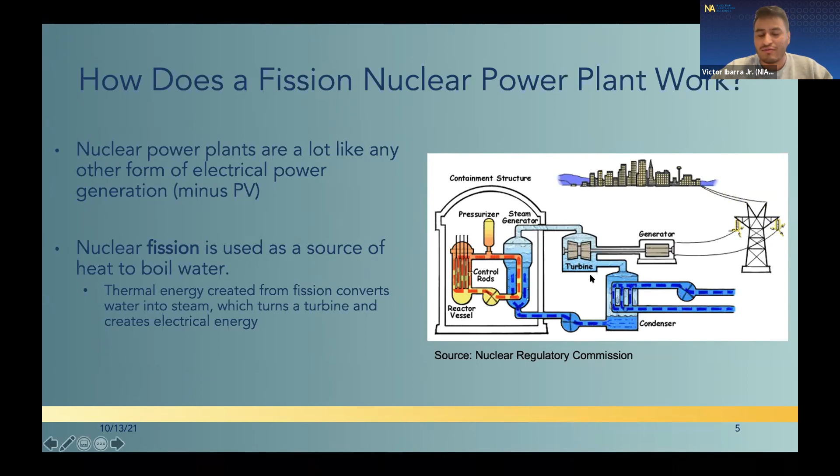So this is also a pretty fascinating concept to explain if you have kids in grade school right now, what the different transitions of energy look like. So we have nuclear energy being converted into thermal energy, to mechanical energy and electrical energy. So it's all very, very fascinating. And as you can see here on the graph on the right, from the Nuclear Regulatory Commission, we have a simple schematic of how a conventional nuclear power plant operates today.

So why nuclear energy? Why do we care about this, and what does it do for us? So nuclear energy is extremely firm, it's clean, it produces zero carbon emissions, and it is extremely, extremely dense. And why is this so important? As Kim was saying, I used to work in Houston, and when I lived in Houston, we experienced a variety of natural disasters such as hurricanes. We experienced the Texas freeze as recently as February.

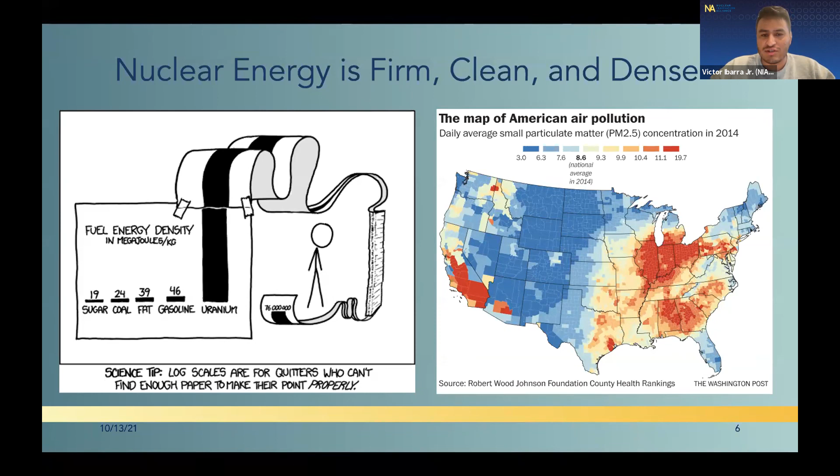And when we're talking about climate mitigation or addressing climate change going into the future, we really need to make sure that we have all the available tools at our belt, and we include all types of technologies moving forward when it comes to securing a very broad energy portfolio. So we want to make sure that nuclear energy is included because it checks off a lot of the boxes, which is that it produces zero carbon emissions. It is firm, which means that it can be paired with variable energy sources like solar or wind whenever they're not producing electricity to back them up. And like I said, it's extremely, extremely dense.

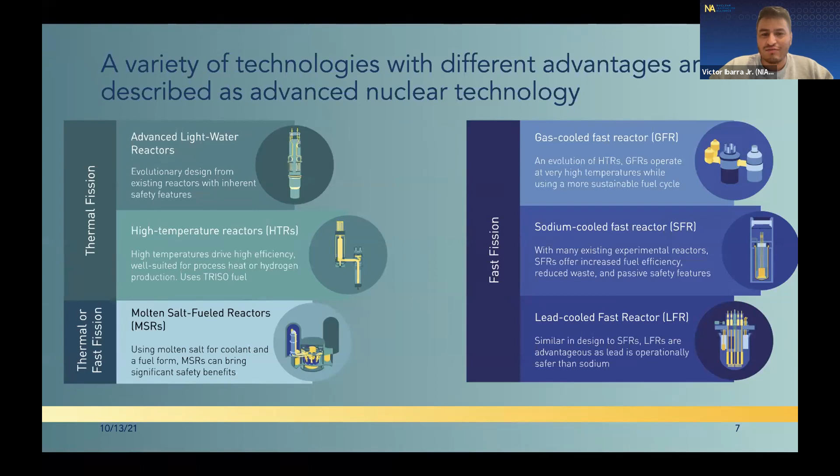So advanced nuclear energy is a very, very broad term. So in these pictures here on this slide, I have kind of broken down what types of technologies we are looking at at the Nuclear Innovation Alliance. We have different types of technologies that range from advanced light water reactors to high temperature gas reactors, molten salt reactors, sodium cooled fast reactors. There's a lot of different types of technologies that are currently being pursued and developed here in the United States and globally, which is really, really exciting because there's a lot of pros to each type of technology.

And the primary reason why people and communities and even policymakers are taking a second look at advanced nuclear technology or nuclear technology in general is because it addresses a few of the concerns that people may have had previously about nuclear energy. People consider nuclear energy not to be safe, and that's not what we believe to be true. We believe nuclear energy is extremely, extremely safe. And this is further addressed by the fact that advanced nuclear energy wants to make nuclear even safer than it already is.

So it does that by changing kind of the fundamental way a nuclear power plant operates by transitioning from active safety systems to inherent safety systems, which essentially means that they rely more on the laws of physics to ensure that whenever a reactor has to go into shutdown mode, it does it without any human input and does it essentially by itself, which is really a marvelous type of engineering. And it also reduces the amount of nuclear material associated with the plant.

So, we have reactors that used to be extremely large, but now we're looking at reactors that may be a lot smaller. And because it's a lot smaller, there's a smaller amount of nuclear fuel associated with it, so smaller inherent hazard. We'll also be using new types of fuel forms, whether it's advancements in technologies that have already existed from the 60s, like what was TRISO fuel or used to be BISO fuel.

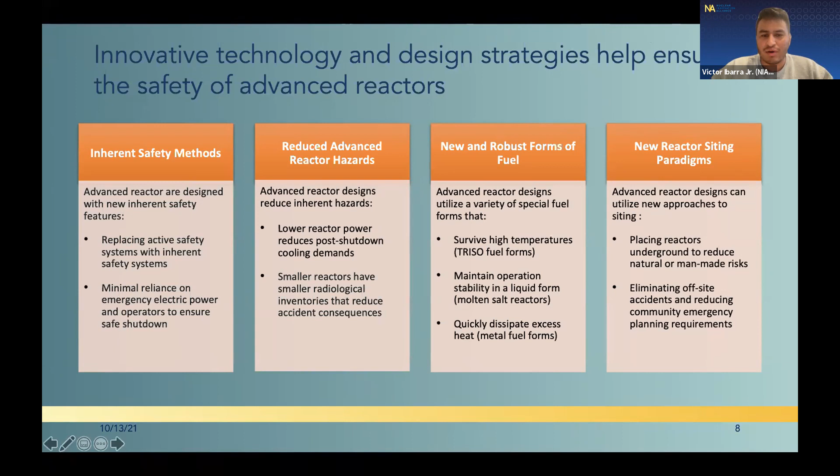And we will also be changing kind of the way we think about siting reactors in the future, because they will be potentially smaller. We will now be thinking about areas that we may not have thought about previously in terms of how we site them or where we locate them. So this, paired with the fact that advanced nuclear technologies have a unique capability to decarbonize multiple sectors, is really making people take a second look at advanced nuclear energy.

So advanced nuclear energy can not only be just used for electricity, but it can be used for potentially district heating. It could be used for co-production of hydrogen, which is a really hot topic right now in the Department of Energy here in the United States, and even globally in entities like the European Union. It could also be used to potentially decarbonize the transportation sector, whether it comes to even just vehicles here in the United States, as in cars, but even maritime or boats in the ocean.

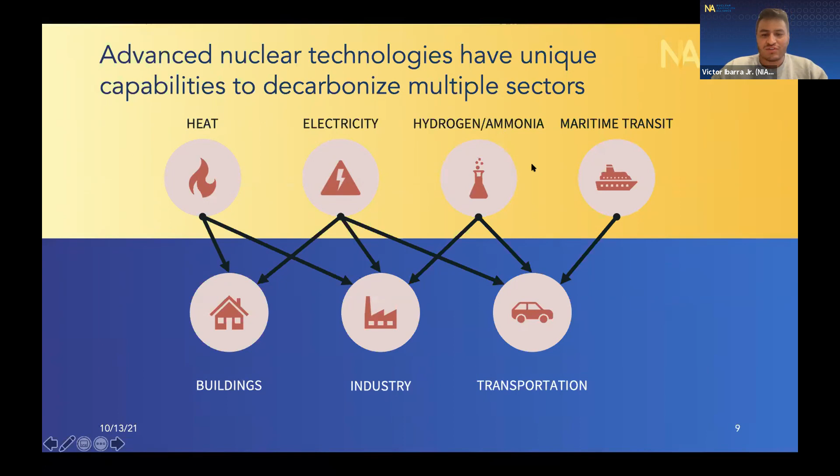It could heat homes. It could decarbonize parts of other industrial economic sectors. Like it could be used to power steel or cement making associated practices. And it's just a really versatile way to decarbonize a lot of the economies that exist nowadays in the United States. So when you put all of these together, it's just a very exciting time to look at advanced nuclear energy. So now I just want to take a little step back and kind of compare advanced nuclear energy to conventional nuclear energy.

So on the left side of this table, we have kind of the characteristics that are associated with a lot of conventional nuclear energy, which is primarily the fact that they're a little bit larger reactor sizes. They are more than 1,000 megawatts electric in size. They're predominantly associated with one type of technology, which is light water reactor technology. And they're primarily baseload generation sources, which means that they operate continuously for about 18-month cycles primarily, depending on if they're pressurized water reactor or boiling water reactor.

But this is extremely important because we are expanding our energy portfolio in terms of how much renewable energy we have in it. So this is really important because the more renewable energy that we produce, we need to make sure that we back it up with either an energy storage system, or we back it up with something firm like nuclear energy, which is why conventional nuclear is really cool. And then these systems are primarily designed with active safety systems and exclusively use LEU fuel rods.

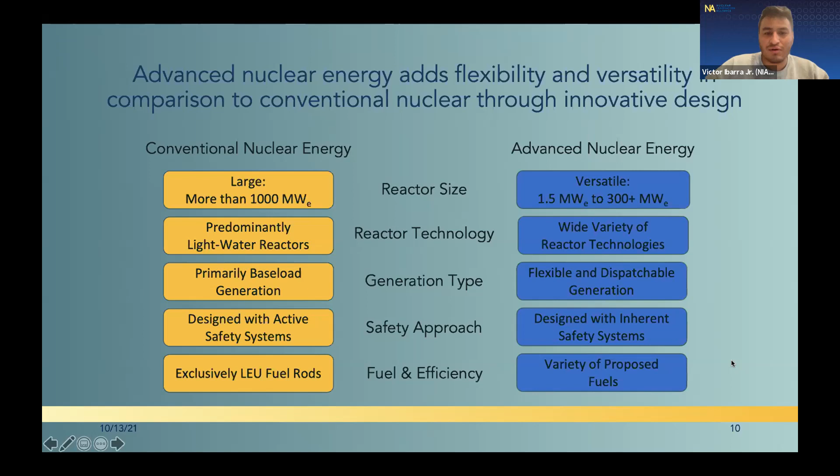emergency response situations. Like I said, before I moved here to DC, I used to live in Houston, where we were affected by the hurricanes and by the winter freeze, and getting power to communities that are hit by disasters is really, really important. So that's also another application of nuclear energy. Advanced nuclear energy will also, like I said, be designed with inherent safety systems and will also have a variety of different types of fuels.

So what does this timeline look like? Because of a lot of the bipartisan efforts that have occurred in Congress over the past couple of years, and because of what's going on now, there will be a few demonstration projects under the Advanced Reactor Demonstration Program that will occur in the late 2020s. For those of you that do not know about the Advanced Reactor demonstration projects, they are essentially award winners that will be able to demonstrate their technology.

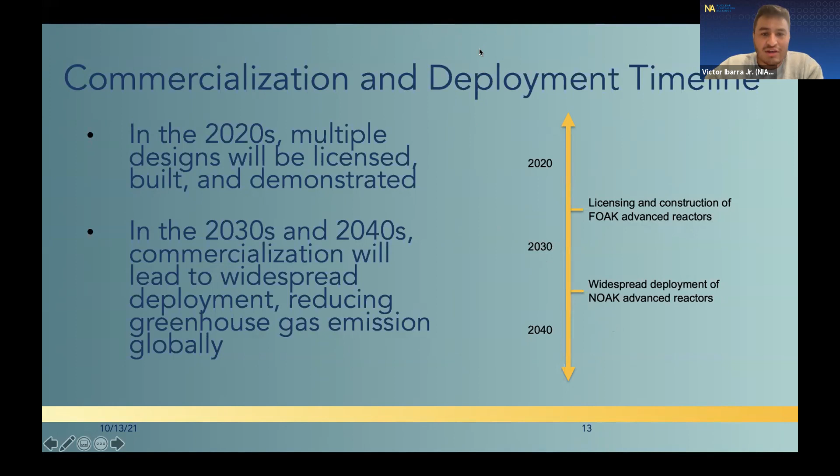The two current demo winners are X-energy and TerraPower, and they will be demonstrating their reactors in the late 2020s. So hopefully through those demonstrations, we'll learn a lot from their technology and eventually be able to fully commercialize advanced nuclear reactor technology by the 2030s and 2040s, which is really, really cool, because regardless of what you think the timeline is for certain types of technologies, our energy demands are still projected to keep growing. So the more clean energy that we can add in the future, the better it will be for us if we're trying to meet deep decarbonization goals.

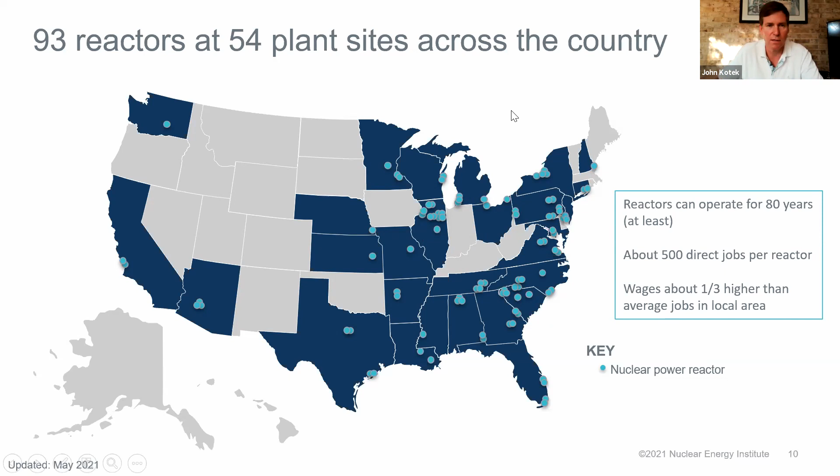All told, nuclear provides almost 20% of the electricity in the US. In fact, it is now the second largest source of electricity in the United States as we see the continued contraction of coal. If you look just at emissions-free sources of generation, nuclear represents more than half of the emissions-free generation we have here in the United States, and that's true worldwide too. If you look at low carbon electricity generation in advanced economies around the world, nuclear is the largest source. If you look at all economies around the world, nuclear is second to hydropower.

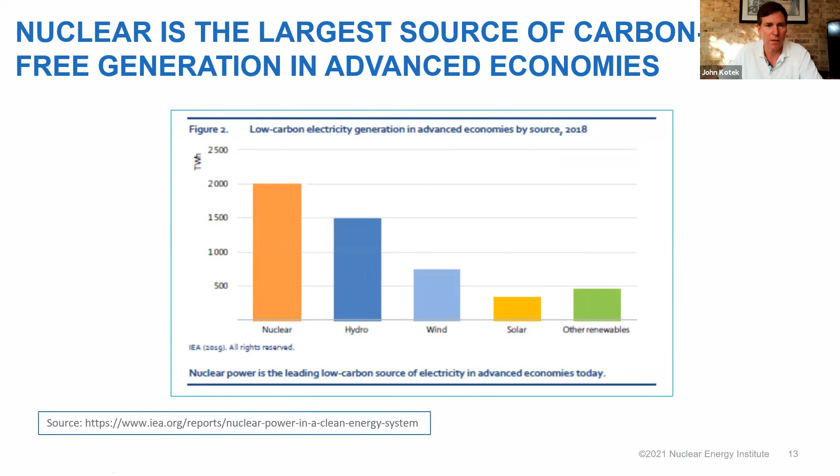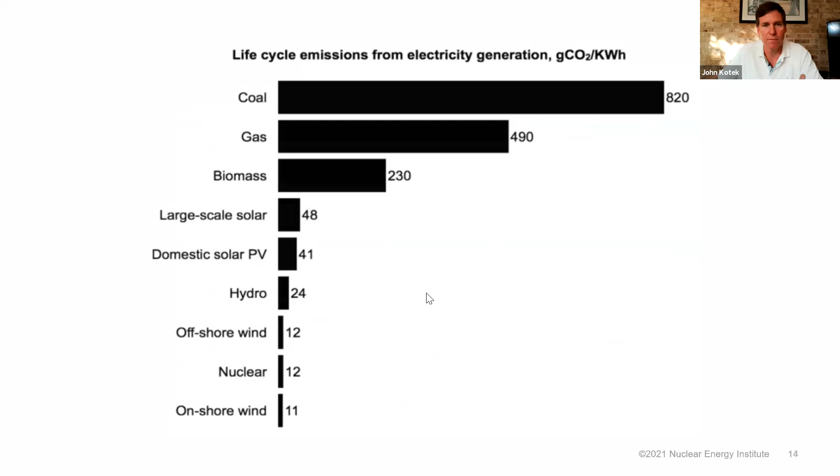There was a question I saw asked in the chat by Paul Gunter. Paul, it's good to see you again. Pardon me while I go back to this one. Asking about the life cycle emissions of carbon, and I'm sorry, there's apparently an animation in here that shouldn't be. If you look across the full life cycle, while nuclear and other technologies have emissions-free generation, there is this question of, well, what are the carbon emissions from the full life cycle?

If you look at the IPCC reports, I'll go back to it again, although it's going to change on me, nuclear is right down there with onshore and offshore wind in terms of total carbon emissions intensity per unit of electricity generated. All energy technologies come with some carbon emissions from mining, from manufacturing, from construction, what have you. But to underscore Paul's point, nuclear is very low when you look at the full life cycle.

When you think about what it's going to take to decarbonize the grid, there's been some really important work done in recent years that have helped people put their finger on why nuclear is so important. So this is a really groundbreaking study from a couple of years ago out of MIT that looked at what is it going to cost to fully decarbonize the electric grid?

And what the chart on the left is showing is if you just try to do it using what they call fuel saving technology, so think of technologies without a fuel like wind and solar, plus what they call fast burst, which is storage technology that can respond to short-term fluctuations in the grid, it's going to cost you anywhere from 10 to 62% more to get to zero than if you include this third piece of the pie, firm low carbon generation.

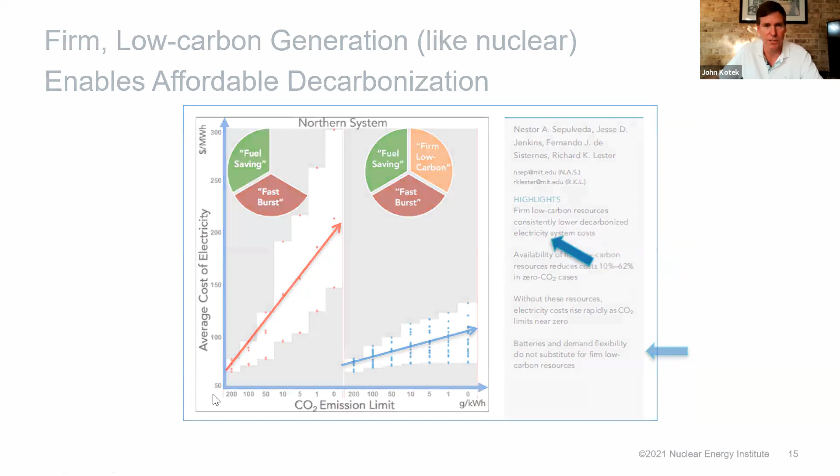Another reason you're seeing nuclear so high on the public policy agenda is because if you listen to President Biden, he says when he thinks clean energy, he thinks jobs. Well, the best paying jobs in the energy sector are in nuclear, all right? And nuclear also happens to be very highly unionized and more diverse than other parts of the electric generation sector,

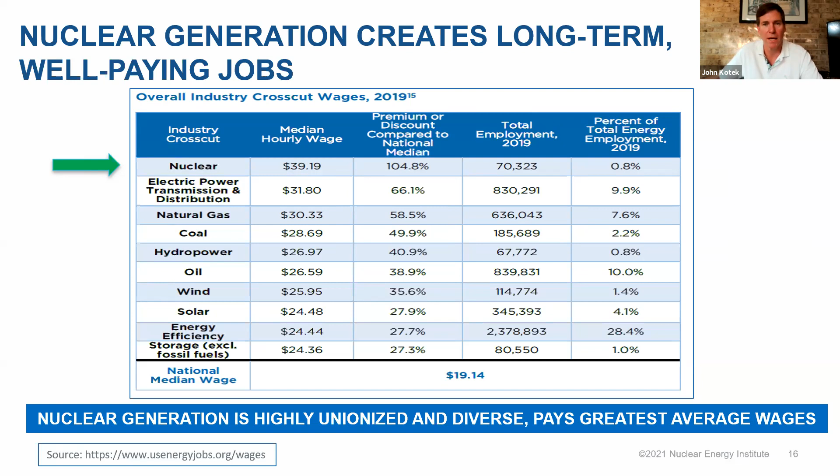all leading nuclear to be very strongly embraced, particularly by our nation's labor unions, which are committed to ensuring that this transition to a clean energy economy also results in the creation of long-term, well-paying jobs in that industry, and nuclear is top of the list. That's why we enjoy so much support.

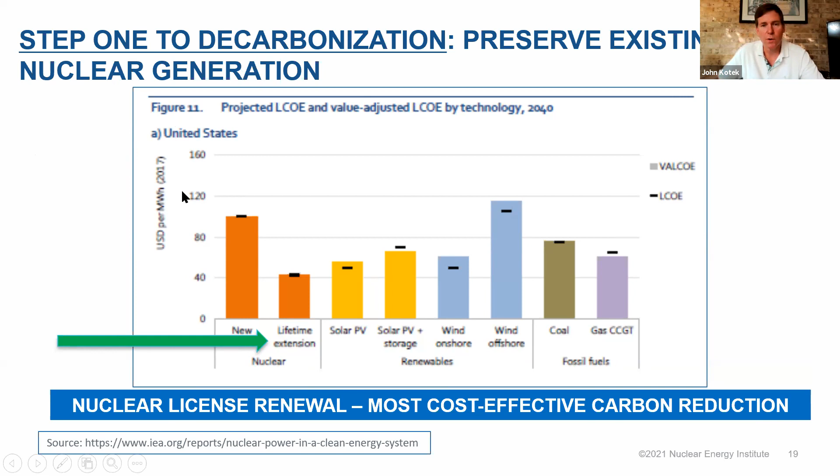So step one in getting to a low carbon grid and low carbon energy system is to keep what we've got. Extend the lifetimes of today's nuclear reactors. So as you may know, today's reactors were initially licensed to operate for 40 years. Almost all in the US have been approved to operate out to 60, and we've got several that have been approved to operate out to 80, with many more under consideration. So our utilities are pursuing retention of existing nuclear as job one in meeting their decarbonization goals.

The second thing they're looking at is the role that firm clean generation can play and must play in fully decarbonizing the grid, and doing so in a way that leaves you with an affordable, reliable system.

In fact, what this study found was in decarbonizing the electric grid in the Northwest. So this looked beyond just Washington State in its law to decarbonize by 2045. It looked at Washington, Oregon, and parts of Idaho and Montana. You can get the grid to zero carbon for about $8 billion a year less with small modular reactors and by keeping existing nuclear than if you try to do it with just renewables and storage alone.

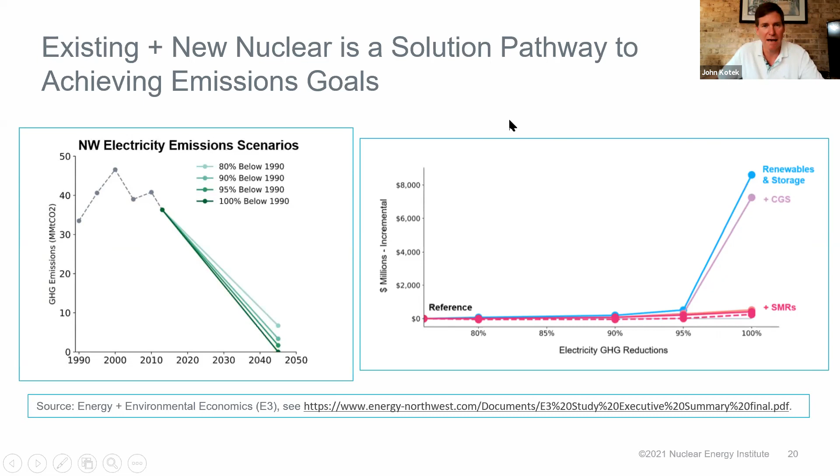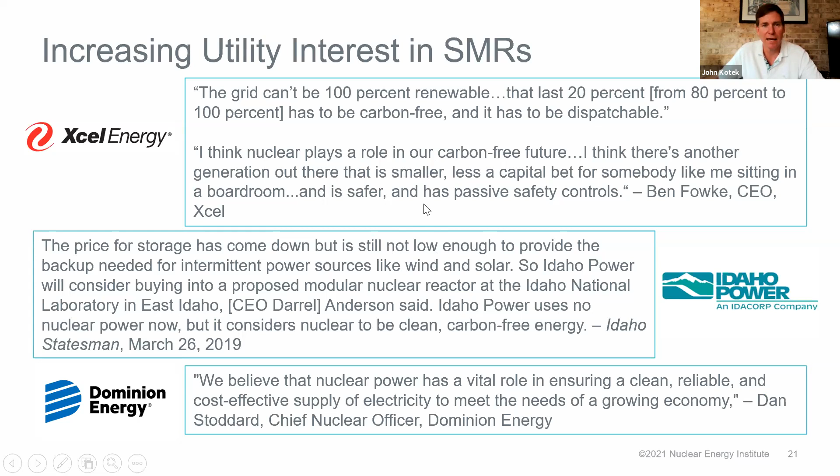That's leading a lot of utility companies to look hard at not just keeping today's reactors, but actually adding more. So companies like Xcel and Dominion that currently operate nuclear plants, companies like Idaho Power, which don't, but have a new nuclear plant planned for their neighborhood out at the Idaho National Laboratory. These companies and many more are now looking seriously at next generation nuclear as having a role to play in getting to that affordable, reliable, decarbonized grid.

Also want to remind folks that when you talk about decarbonizing our economy, as the president wants to do by 2050, that goes way beyond the grid. Right? Only somewhere between a quarter and a third of emissions in the US and worldwide are associated with electricity production. When you look at things like transportation, industrial applications, agriculture, other energy end uses, you've got a lot of use of fossil fuels in there that are going to be, in some cases, very difficult to decarbonize using renewables alone.

Having a source of high temperature process heat, for example, to help decarbonize things like iron and steel or concrete production can make a huge difference in trying to decarbonize some of these difficult to decarbonize energy end use sectors. That's another reason that's driving interest in new nuclear.

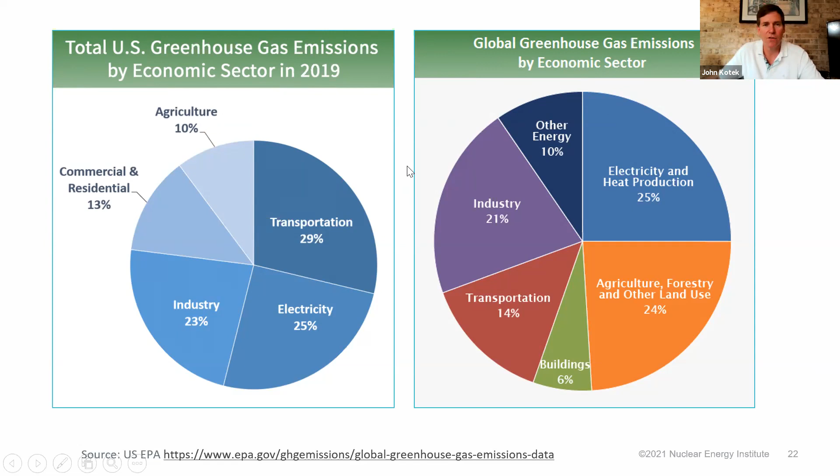And so, as we look at today, the focus has been pretty much on decarbonizing the grid, and to a certain extent, electrify as much as you can. Things like light vehicle transport can and should be electrified. And the move to electric vehicles, I think, is going to only accelerate in the coming decades. But there's still a lot of energy end uses that are going to require something other than electricity, and we think nuclear has a big role to play there.

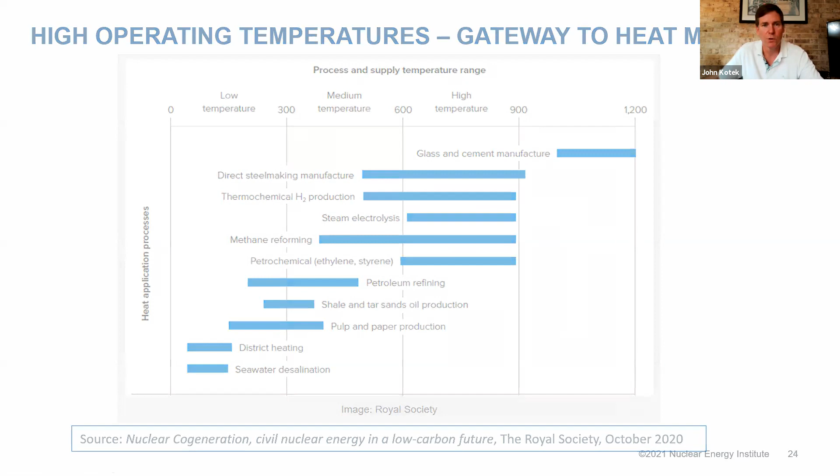The last thing I'll mention before we turn to questions, well, two things. One is that there's a potentially very large market for new nuclear globally. If you can develop a nuclear energy system that can compete and win in the United States market, that can do very, very well globally. And as other nations seek to decarbonize, what we found is that you're going to see roughly a doubling of nuclear energy capacity around the world between now and 2050. And we think US companies can capture somewhere between 1.3 and 1.9 trillion of that market.

It's going to be a huge market. Of course, the clean energy market writ large is going to be many, many tens of trillions of dollars around the world. But there's a huge opportunity to, again, create good paying long-term jobs in the US economy by competing and winning in civil nuclear export markets.

One last point I think is important to make is, you're going to hear people criticizing nuclear, and certainly I saw in the chat, the waste issue has been raised. I can talk about that here in a minute as we get into the Q&A. Folks will talk about costs, they'll talk about other challenges. As you're engaging in this conversation and studying alternatives as to what it's going to take to decarbonize, always ask the question, compared to what?

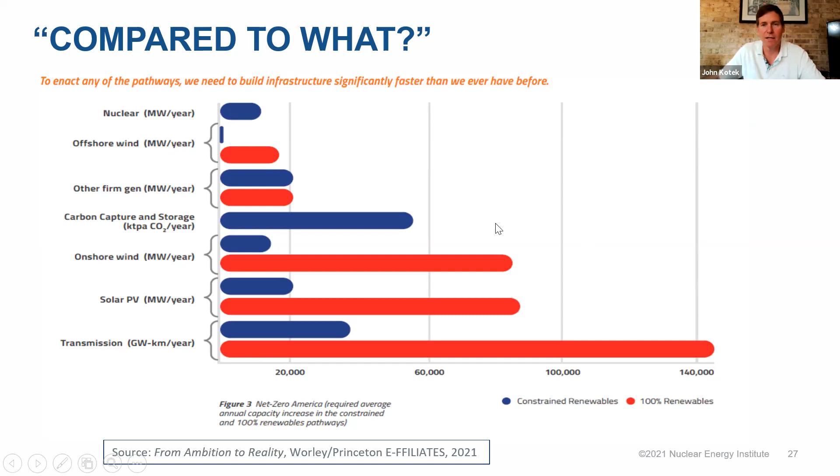Nuclear energy has an important role to play now and has, in my view, an even more important role to play in the future in helping us get to that affordable, reliable, decarbonized grid and decarbonized energy economy of the future. So let me leave it at that for my presentation.

But Kim, I did see in the chat that there was a question about the waste issue. Yeah, do you mind if we come back to that? Would that be okay? By all means, in whatever order you'd like. I do have some images I can show that help, but I can stop sharing and then start again later if that works for you. Yeah, let's do that. Thank you, John.

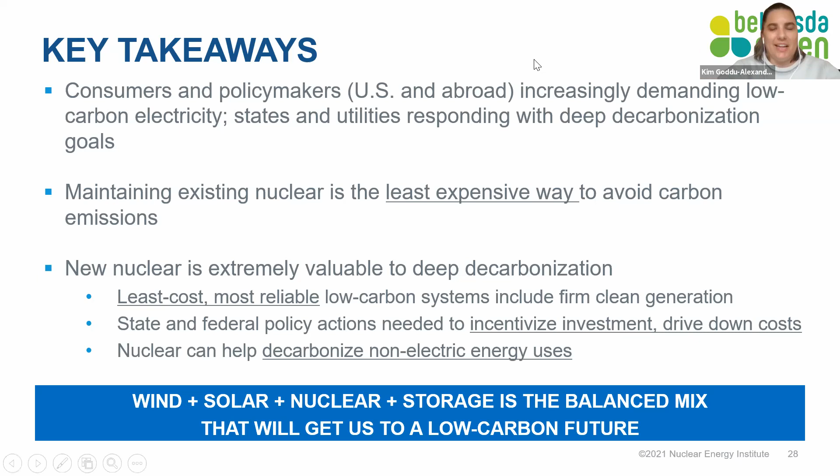I really appreciate that. So what I'd like to do now is address a couple of the questions in the chat that just go over some basic things about nuclear. Again, not everybody on this call has the same understanding of nuclear. So I'd like to get to some of the more basic questions first so that everybody's on the same page. So Victor, I'm wondering if you could talk about how long it takes to build a nuclear plant.

Yeah, so that's a great question. Back when reactors were first expanding here in the United States, project timelines ranged anywhere from 7, 8, 9 to 10 years. Because the United States stopped building a lot of nuclear power plants for a few decades, we've lost a lot of the construction knowledge associated with building a nuclear power plant. So as you can see now with some of the ongoing projects, maybe at Vogtle, they're taking a little bit longer than originally projected. It's reached above 10 years at this point, and hopefully will come into operation in early 2022, so next year in a few months.

But the thought process, especially with advanced nuclear reactors, is because they'll be smaller in size in terms of megawatt output, they'll take shorter timelines to be built. How quickly we can build these is up in the air, primarily because, like I said, we lost a lot of the expertise associated with construction, but hopefully we will start building more reactors. And part of the reason why advanced nuclear technology is really interesting is because some of these reactor designs will actually be built modularly.

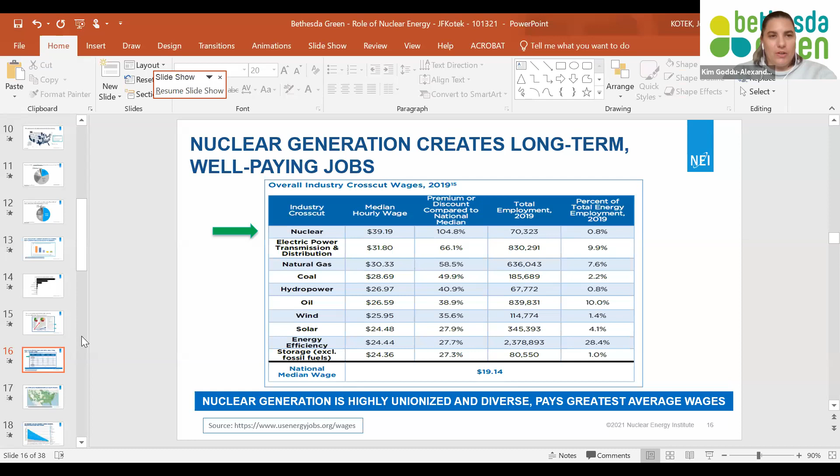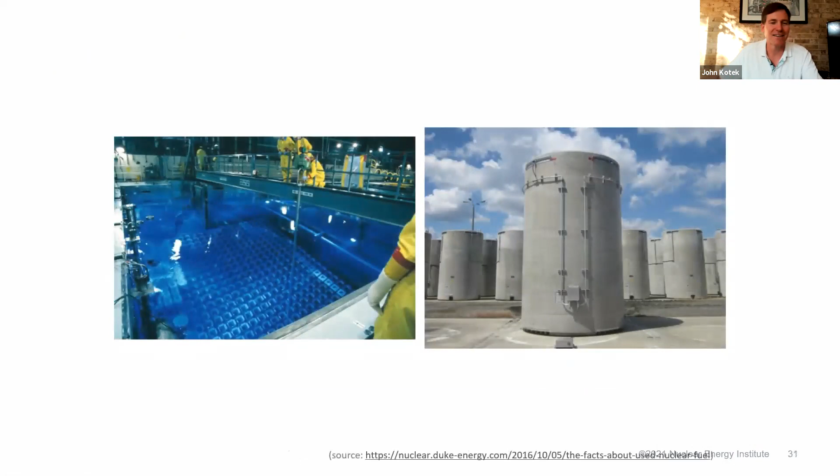On the waste issue, let me pull some slides up here. Real quick, while you're pulling that up, do either you or Victor want to talk about what nuclear waste is so that we have a good working understanding of what it is? Well, bear with me. Here's a picture. I got a few pictures. So just so folks know, sorry, there's some animation in this. I'm going to have to not show it in full screen mode.

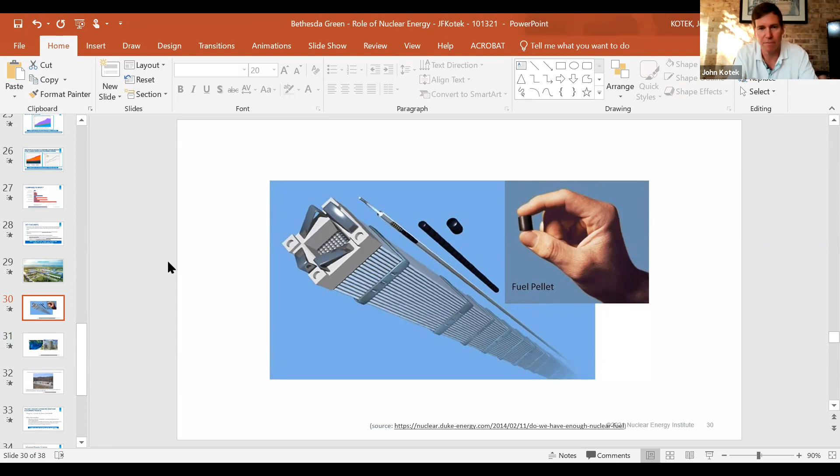Now, depending on the reactor design, there can be somewhere from 200 to 500 of these assemblies in a reactor core. They're all a little different. Those stay in a reactor for about 5 years. After they are taken out of the reactor, they are both very thermally and radioactively hot. So they need to be shielded and cooled. So they go into one of these pools you see on the left.

Every reactor site has one. And the fuel will stay in there for some period of time. In the US, they tend to stay in there for decades. In other countries, they move them out faster. But ultimately, all of this material will wind up in dry storage casks. So you see one here. This is a big, 18-foot, give or take, tall concrete and steel cask that is air cooled, and it sits on a concrete pad, right? And that's where the fuel goes.

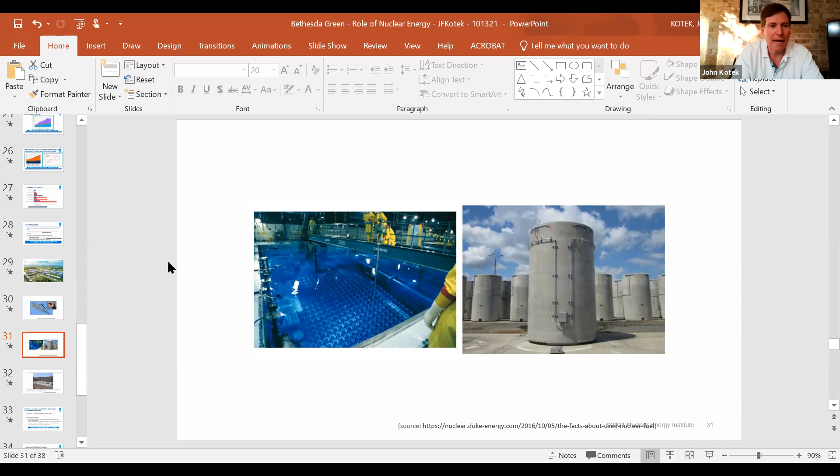Now, the downside is we were supposed to have a repository developed to serve as a final resting place for this fuel decades ago. When I was at DOE last time around, I ran the federal effort to try and get a program started again, because a decision had been made back in 2010 that we weren't going to go forward with the plan that we had, which was to develop a repository at a place called Yucca Mountain in Nevada. Congress has not been able to agree on a new path forward. And so in the meantime, the material sits there.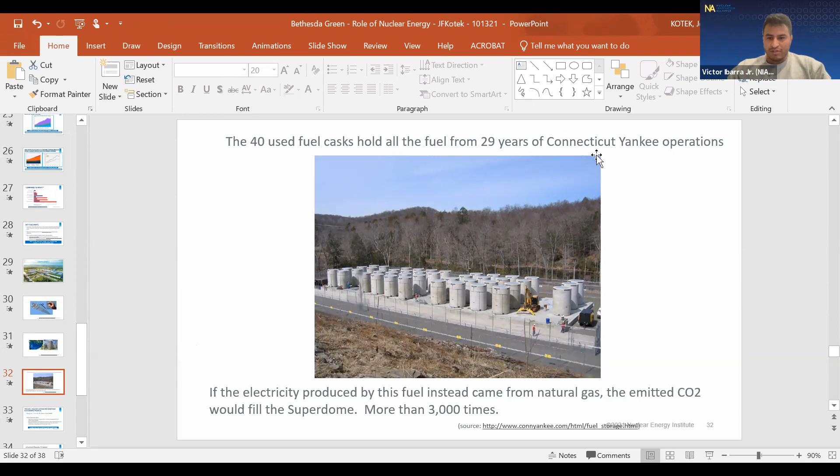Yeah, so I also see Paul adding a little bit more information or some comments in the chat. One important thing that I also want to point out is that there's different classifications of waste. There's the fuel waste that we are attempting to find a permanent solution for here in the United States. And there's ongoing efforts internationally that may serve as case studies that may give us insight into what a permanent geological repository may look like for the United States in the future, like the Onkalo geological repository site. Is that in Finland, John? Yeah, Onkalo is in Finland, yes.

Yeah, so I believe they're the first, or at least the most recent country to begin a program similar to that. And going off of different types of nuclear waste, we were talking about specifically fuel waste, but there's also different categories of nuclear waste. There's Class A waste, Class B waste, Class C waste that are produced at varying levels and can be treated and or disposed of differently than reactor fuel, essentially.

So, in Texas, we have a low-level waste repository site where they treat and handle a lot of nuclear waste. And even at the hospital I used to work at in Houston, I would deal with nuclear waste literally 4 or 5 times a day, pick it up from where they were using it in the laboratory site, and then take it where it needed to be held until a waste solutions entity would pick it up, and then they would take it to the repository site where it would either be treated or disposed of. So it's also important to know that there's different levels of waste and classification systems associated with nuclear waste. So thanks to Paul for bringing that up.